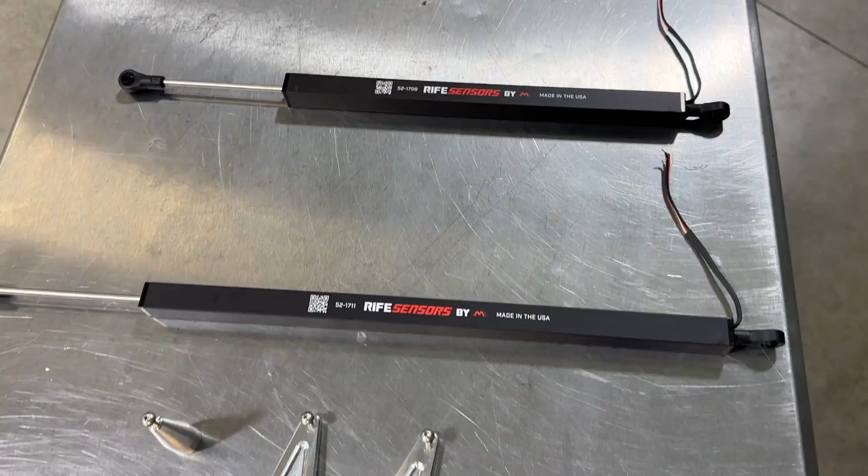Today we're going to go over measuring your car, choosing the correct length shock sensor, how to set it up in your ECU, and how to review the data once you've made a pass at the track. We have available 6 different length shock sensors. The shock sensors range from this 1.75 to 11 inches of extension.

This little guy is used for transmission position sensor. You can get creative with these. You can literally use this as a 0 to 5 volt sensor. So if you need to measure the distance of anything, basically you can set this up. We've sold them to guys on boats, different applications. But generally this little guy paired with our mount here is used on the side of the transmission for gear position. Then we move into our 3-inch sensor, our 6-inch sensor, 7-inch, 8-inch, and then the big boy, 11 inches.

Depending on your suspension travel and your car, you're going to choose the sensor that fits in your range so the sizing stays compact and you have a usable range of data. These sensors can be used with any ECU or data logger. They provide a 0 to 5 volt signal that's attached to the distance that the sensors travel. It's a linear position sensor.

They come unterminated, so you can choose the connector of your style if that's on your harness or if you need to wire it from scratch. We have multiple connectors available from the RacePak Molex to DTM connectors so you can pin out. All the instructions and calibration data for these sensors are on the website. They'll come with it, or you can scan the QR code here.

We have a few different mounting options available. These mounts that we have currently are for a coilover type strut. This would go over the bolt to extend the sensor out depending on your car. The mounting for these sensors gets pretty custom car to car because every car is built different, if it has like a factory style chassis or if it has a tubular style chassis. But these mounts are quick and easy for a straight coilover setup to use.

The front mounting gets a little trickier again because every car is a little different. So you have to do weld-on tabs. Depending on the car builder, if you buy a chassis, they're going to have the tabs built on them. But if you're starting from scratch, you'll have to just kind of lay the sensor out to see where it's going to be and then weld and measure your tabs accordingly.

Okay, so now we're going to show you what to look out for when choosing the right length shock sensor for your car and mounting it. There's really only a couple things to look out for when mounting a shock sensor. For one, you want your car at full extension to make sure that you're not going to overextend the sensor. You want to leave some sensor in the body to make sure that it doesn't damage the sensor. And then the same thing at ride height and then in compression.

So you just want to make sure that you're not overextending or collapsing the sensor, causing damage to the sensor body. You want to try to mount the sensor as parallel as possible to the shock so there's no binding and it has a smooth travel up and down. We're underneath the rear of my car, which currently has a tab welded onto the top bar. And then I use our mount on the bottom of the coilover strut here, which will space the sensor out perfectly, and then we'll get our measurement.

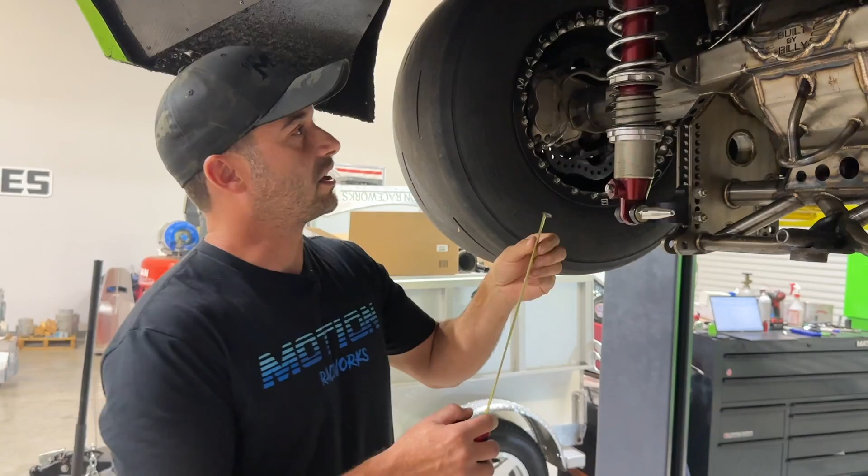So now with the car in the air, the rear end's at full extension, we'll take our measurement from the mounting tab at the top to the mounting tab at the bottom. And we'll note down that measurement. On the website, each sensor length has the description of the fully extended and fully collapsed size. You won't have the sensor with you to try to size up, so you're going to have to go off your measurements. Got the fully extended measurement now, we note that down, and now we'll get a measurement at ride height, note that down, and then try to find the sensor that fits the best in that range.

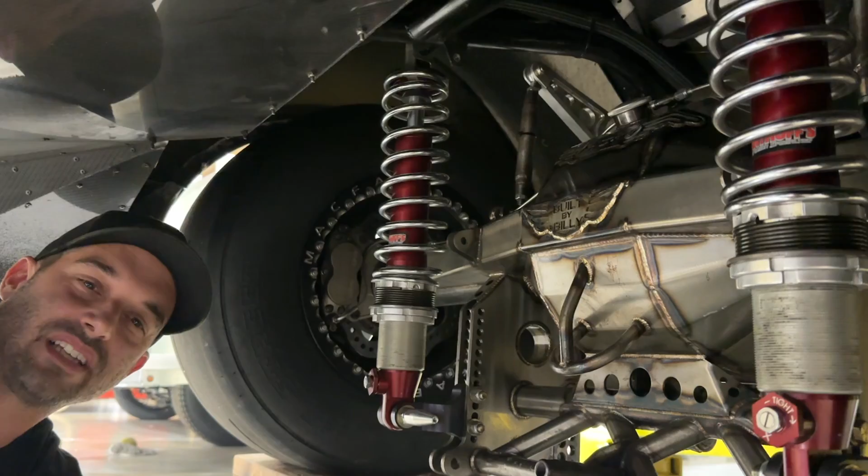Now we have the car sitting down on some wheel cribs, so it's at ride height and we can still get underneath it. We're going to take the same measurement from the top mount to the lower mount. And now we know our ride height measurement, and I know that this car has about 1 inch of compression available, so I'll factor that in to be my bottom number. So for my car, we chose the 8-inch sensor, and we're going to go ahead and install that.

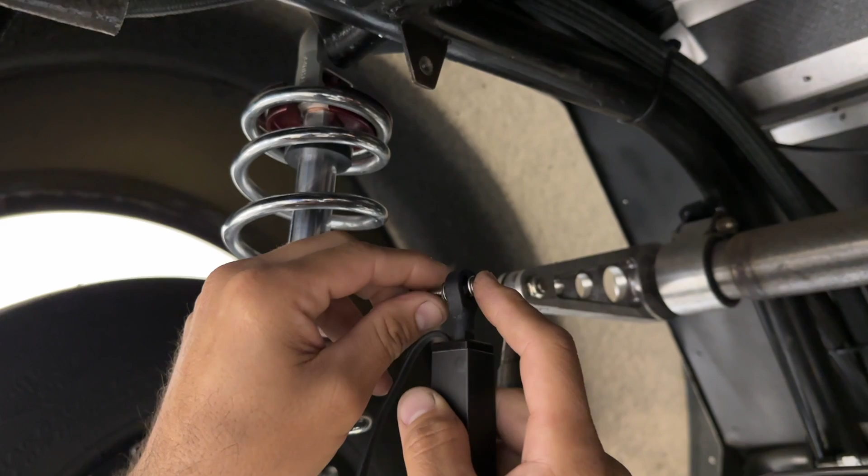For this tab style mount, I use some washers here to space the heim joint off the tab. If this bolted up directly to that flat tab, it would eliminate any movement in the heim and it would cause the sensor to bind and possibly break. We want the heims to be able to move free. That's their job. So we space it off the mount and go ahead and bolt that up. We'll go ahead and attach this to our lower mount. Put a dab of Loctite on this bolt because we're tightening against plastic.

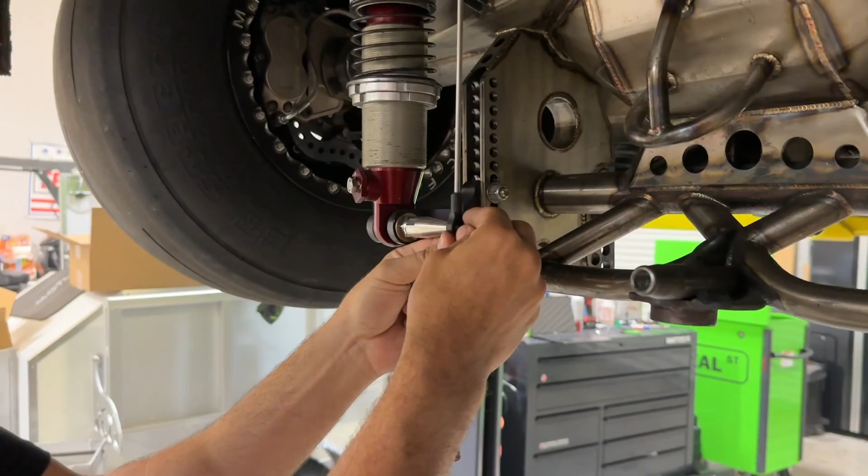Okay, so there's a couple different ways to set up the shock sensor in your ECU. Depending on your ECU system, it may vary a little bit. If you go to the website on the shock sensors or scan the QR code, it will bring you to our instructions. On the instruction sheet, we have a table populated with multiple different cells with voltage range and travel position of the sensor. Today, I'm going to show you how I set it up on my Motec, doing kind of a custom table, which is available on most ECUs. This will give us the exact range of the shock.

So what I like to do is to zero the sensor in my ECU at the car's ride height, and then measure how much travel the car has, and then set the top number to that exact extension. So when I'm reading my data on the data log, the car's sitting on the starting line, the shock sensor front and rear is reading 0. So that's my base point, 0 inches.

Once the car leaves the starting line, the front end extends, the rear end extends or compresses. You're going to be able to see exactly where it is in the travel. 1 inch is 1 inch, 2 inches is 2 inches, and it's easier to interpolate the data after the fact like that. So we're going to go ahead and set that up now.

The car right now is currently sitting at ride height. So I'm going to go in and look at the live voltage reading, enter that in as my 0 value. Then I'm going to raise the car up to full extension and then enter in that value as 6 inches, because I know that this car has 6 inches of travel. I've already measured it. So basically I'm going to have a 0 mark, a 6-inch mark, and then when I read my data log, it's going to be between those two.

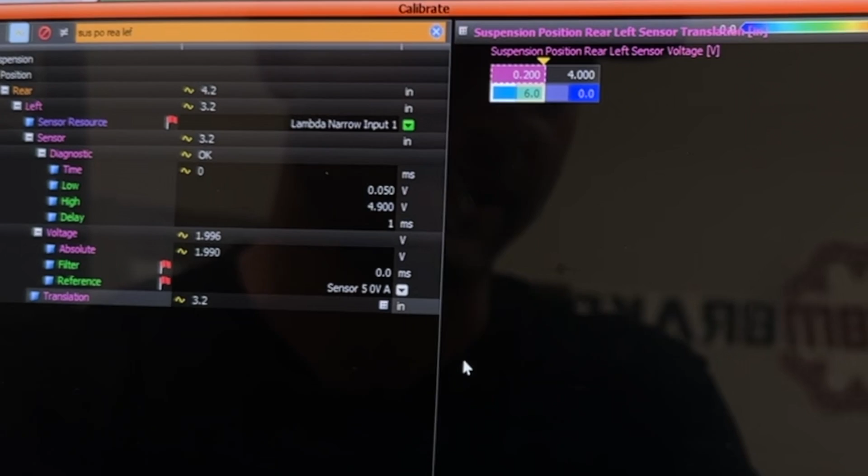So I powered on the ECU. I'm in the left rear suspension position, which is my left rear shock travel sensor. Each corner will be done the same individually. We're going to go to the translation table here where it has our voltage reading converted to our inches. Right now we can see the live voltage of the sensor as it's sitting at ride height is 1.996.

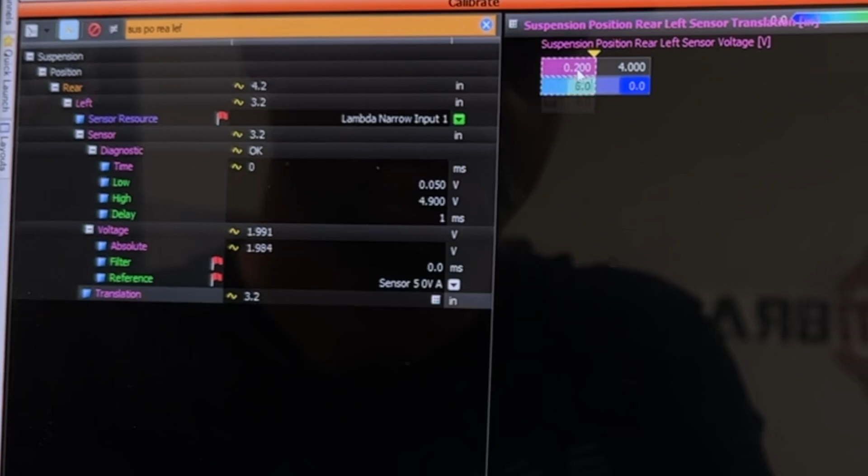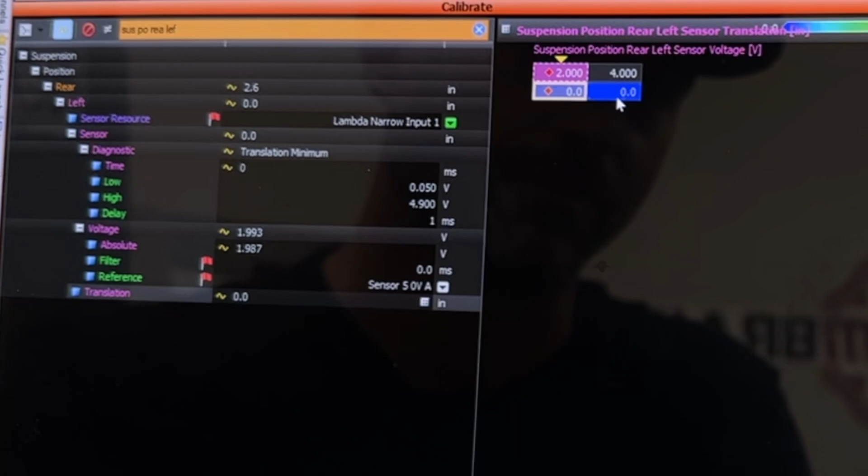Okay, so let's just call this 2 volts. 2 volts for this reading, 0.0. And now our translation to inches is going to be 0 inches. So now we see our shock sensor is reading 0 inches. And now we're going to go ahead and raise the car up and see where our voltage level is, enter that in and enter our 6-inch number there, and then it'll translate between 0 and 6 inches.

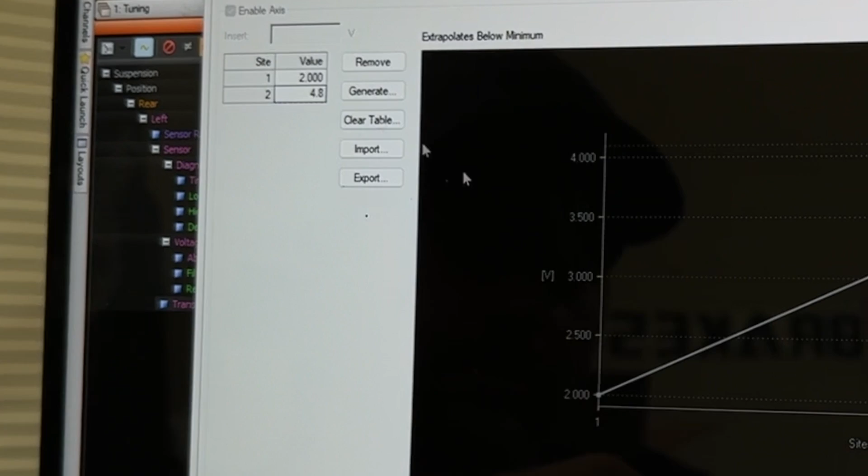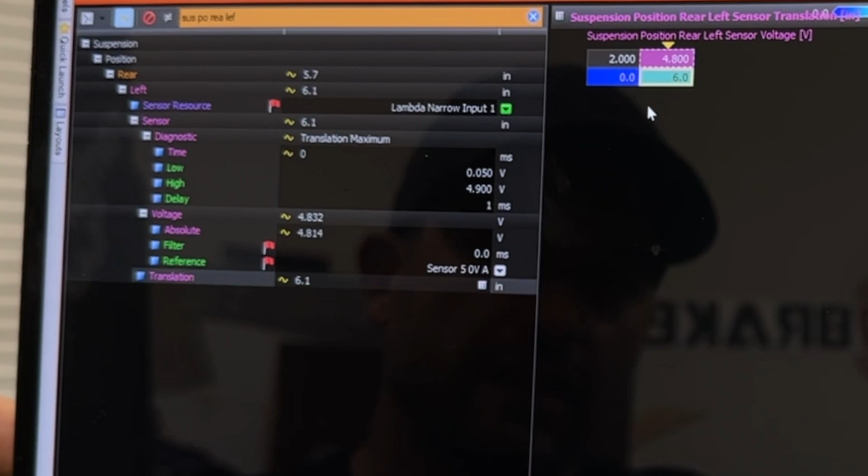Okay, so now the rear end at full extension, we have 4.8. So we'll go into our table, set our high number as 4.8, and set our value for 6 inches. Save that. And now the ECU will interpolate between these two numbers in the background. Halfway would be 3 inches, 2 inches, 1 inch extension. So right now our rear left is at 6 inches because that's what we set it to. Lower it back down.

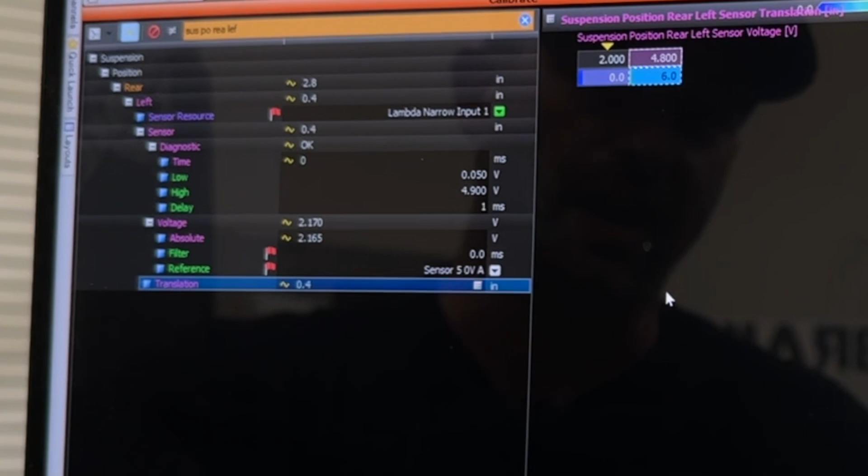Another thing to keep in mind, depending on your vehicle, is you want to have the driver in the car. Depending on how crucial and how exact you want this measurement, it may change 1/10 of an inch or so. But generally speaking, on the data log, you're going to get an idea of what's happening there.

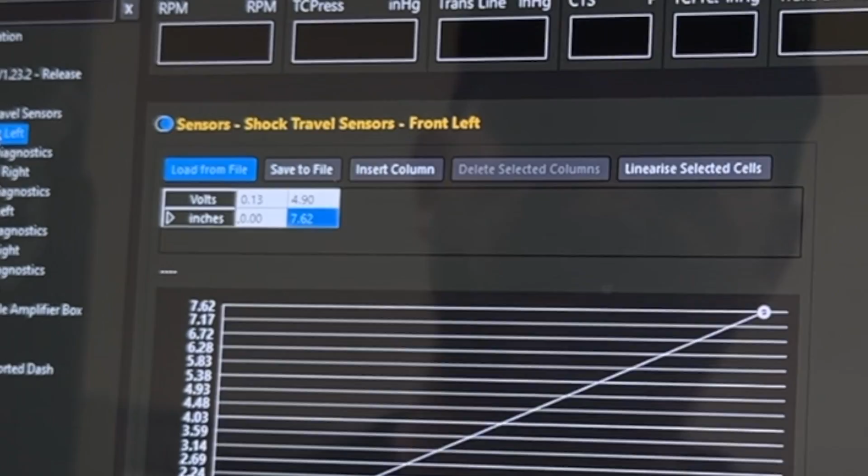Now we're going to go ahead and walk through the Haltech instructions. I won't be live on a Haltech car, but we can go through the software. It does it about the same way, but a little bit differently. Okay, so let's get back here on the left rear shock sensor, rear left.

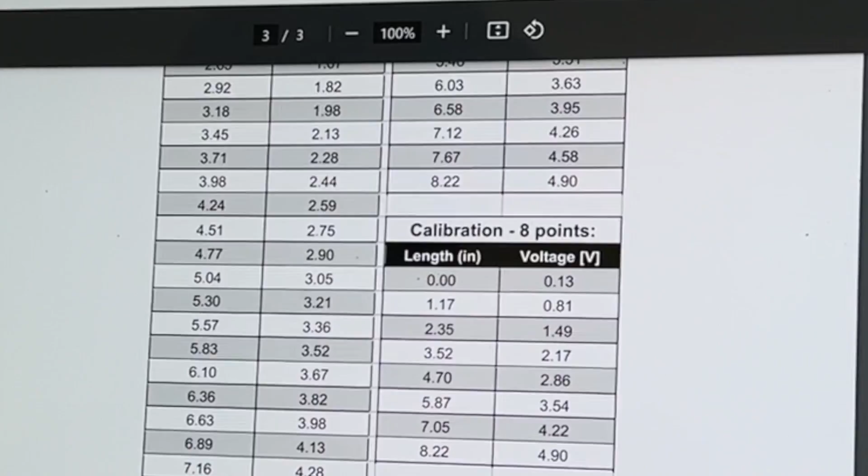Okay, so now in the Haltech, we're going to enter in our native RIFE sensor documentation: 0.13 volts is 0 inches, and 4.9 volts is 8.2 inches. So 0.13 and 4.90. This was 0 inches, and this was 8.22 inches. Now what this is going to do is take the very bottom of the sensor as 0 inches, and the very top of the sensor as 8 inches.

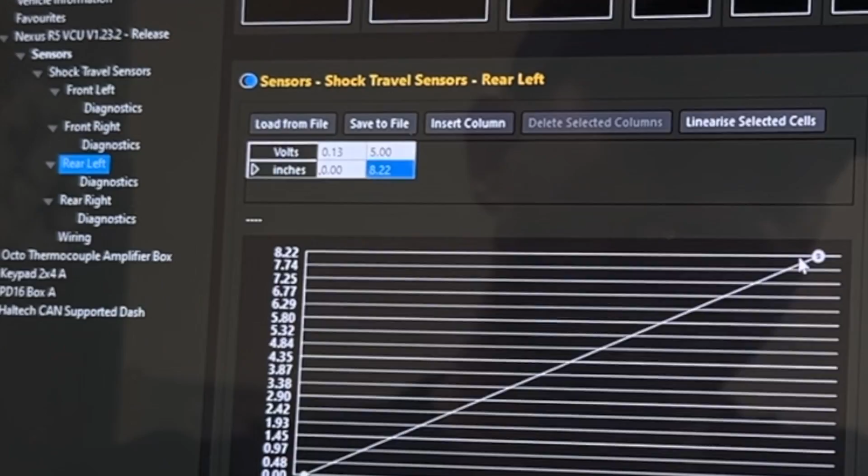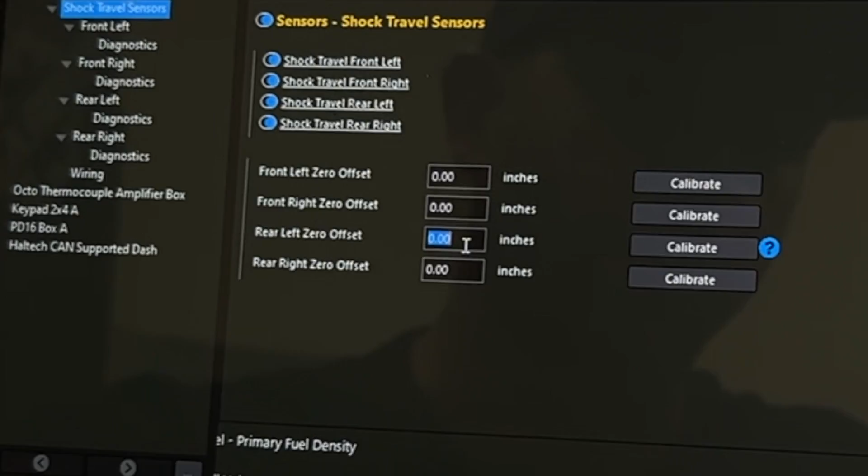Now, like we were showing before, where you have your shock sensor position on your car, it may not be at the sensor's true 0 because you may not be using the full travel of the sensor. Now in the Haltech system, what this has is an offset. So now with the vehicle at ride height on the ground, we can go in here and calibrate our offset. So this will automatically 0 your ride height position. So when you're reviewing your data logs, you'll leave the starting line at 0 inches and then go up or down from there, and it'll be easy translatable data.

So this is a data log pulled up of a 1/4 mile pass with shock sensors in place. The yellow lines are the rear shock sensors, the blue lines are the front shock sensors. You can see on the starting line we have a little bit of an offset reading between the two sensors, and you can see it gets a little worse down track. These should have been calibrated closer to each other so that way you can actually see if you have any twist or not in the car, which is the purpose of running 4 sensors all the way around.

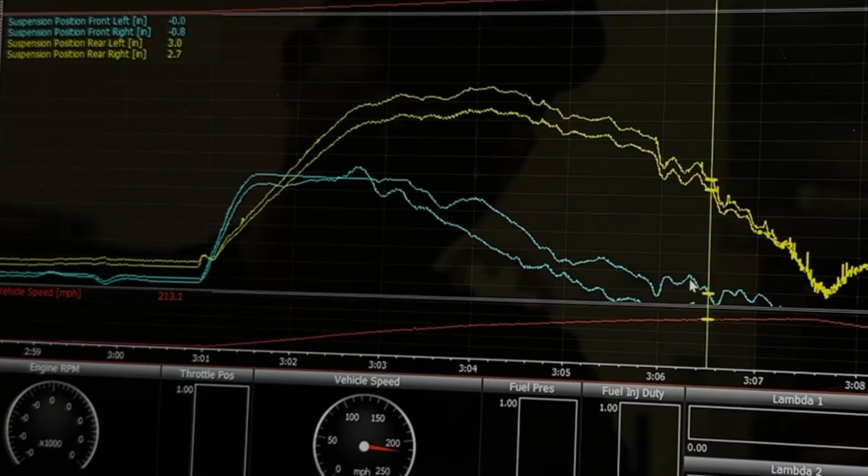But we'll go right here. Race time is at 0, and then we'll start to run, and you can see basically what the suspension is doing. The car leaves the starting line, front end travels up to the travel limiter, and now the rear end is extending, getting through the run. Front end is starting to come down, rear end is starting to come down. By the finish line, the front end is actually in the negative and the rear end is closer to ride height. This is a pretty good example of a car that works well with some aero, and this is basically what you're going to look for.

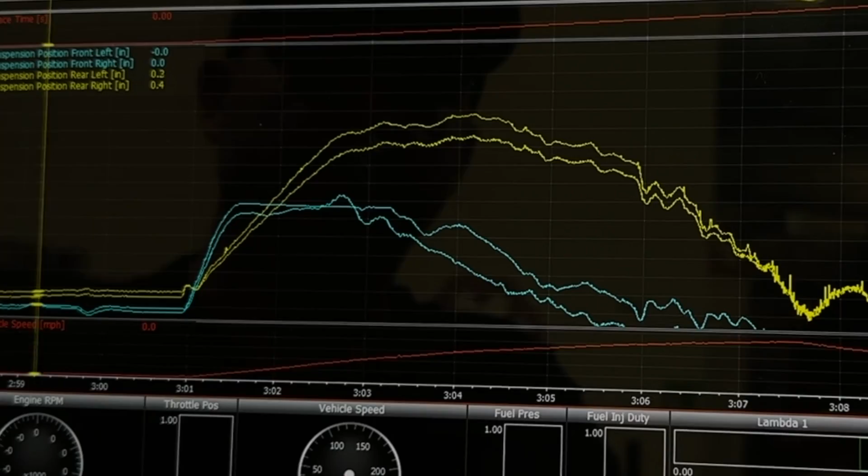So in your car, you're going to use this data to tune your suspension in multiple different ways. In the past, you relied on a video from the side of the car. Maybe it got a good shot, maybe it didn't get a good shot. You really didn't know. Where this is really going to come into play is like if you have wheel spin or a wheelie, because basically you're going to take a timestamp on the log. You'll see where the tires spun, and your guy said, "Oh, the front end was too tight." But look, the front end was already up and doing its thing, so you know that the front end really wasn't affecting it as much as maybe you thought it was. So in here, you're going to get real-time shock data of what your car is doing on the racetrack to be able to make improvements and adjustments from there.

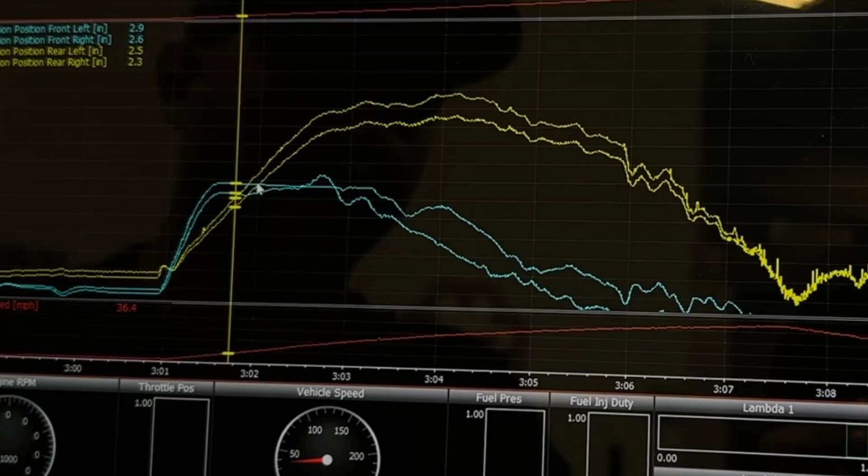When working with a lot of shock manufacturers, they're going to ask you inches per second. That's how they tune the shocks without being there. To figure that out, you're going to be able to do the math. You're going to be able to take your timestamp at a point, take your timestamp at another point, calculate how many inches it traveled throughout that second, and give them the information they need to help you tune your shocks.

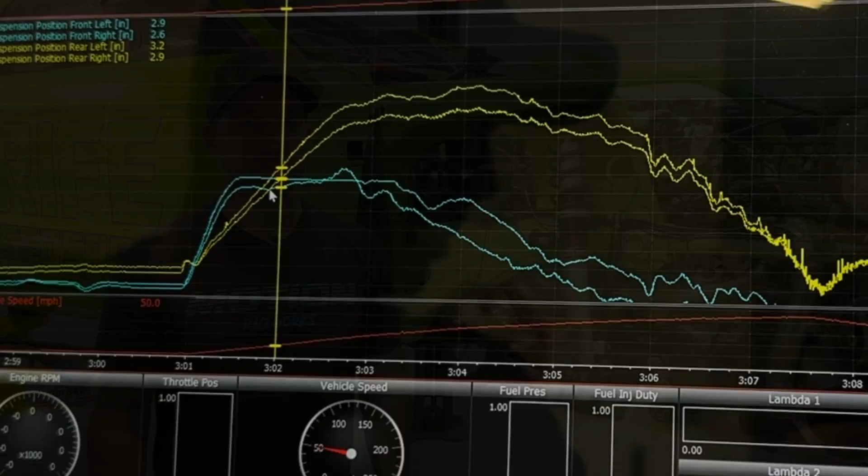All right, so now we're going to move on to the front. Same principle applies in the front as in the back. You're going to measure your suspension fully extended, fully collapsed, get your measurement, and find the best sensor that fits in that for you. One thing to keep in mind with the front is if you run a travel limiter, make sure you do your extended measurement with the limiter disconnected. So that way, if you disconnect the limiter to work on the car, you don't have to disconnect your shock sensor, so it can go through the full suspension travel, collapse, and extend without damaging the sensor.

You want to, again, keep the sensor as parallel to the shock as you can. I know on some front ends this is a little difficult and you have to get the sensor angled. That's fine, it will work as long as there's no bind on it. You'll just lose a little resolution of the sensor as it won't have the full exact extension of the shock. So this car has a mounting point on the top. It has a tubular control arm on the bottom, which currently doesn't have a mounting point. So we'll have to do a little weld-on tab onto him. We'll do our measurements from mount to mount, collapsed and extended, and pick the sensor that fits the best.

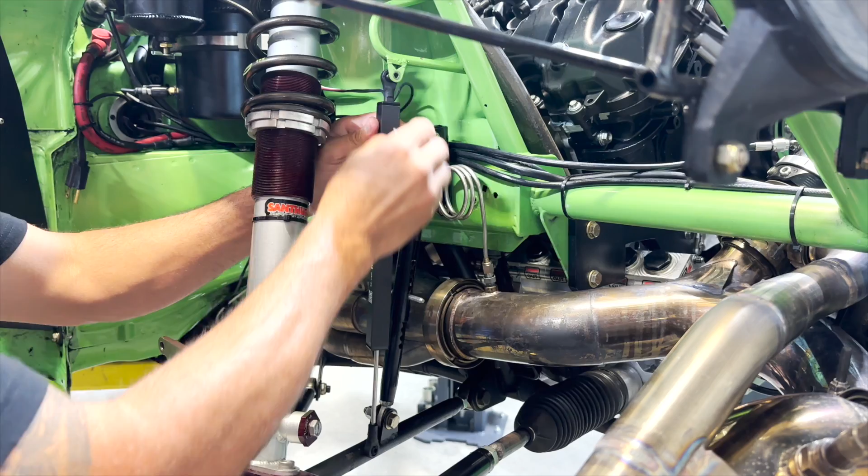Okay, so hopefully this video gives you a better understanding on how to measure, order, set up, and read shock sensor data.